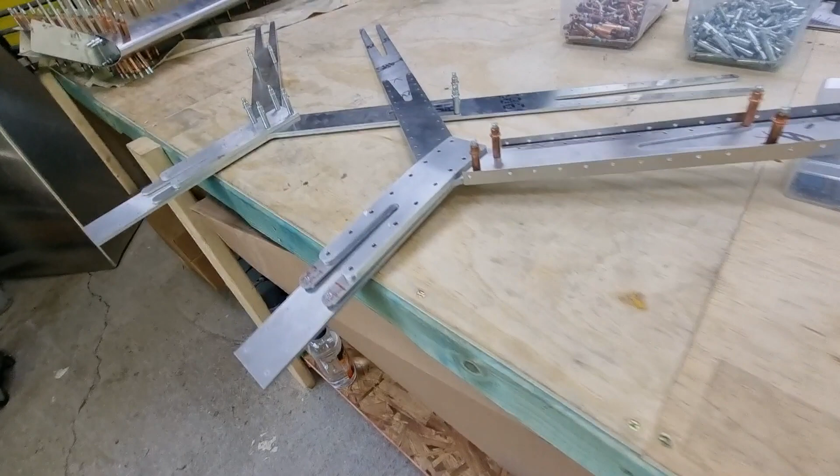Okay, this piece here is now a garden ornament. A paperweight, a piece that I can show other builders if they come around and say this is how you don't do it. And this is the replacement part.

I'm just going to go through the costs initially. The costs initially, I think, were around about $1,200 or something US dollars. About $1,400 US dollars to get it into this country. Now, I accept the fact that it's probably $200-300 in parts. I accept the fact that it's going to cost me upwards of $1,000 in shipping. The horrible thing about all that is it's converted back over to Australian dollars and ended up costing me about $2,100 something dollars. An absolute lesson has been learnt from that.

That could have been $2,100 Australian towards leather seats, a propeller, partial instruments, radio, painting, I don't know. Who knows? But anyway, money wasted, not that you put into your budget. So it's a lesson learned, and I don't really want to make another one. So let's just go through what I did.

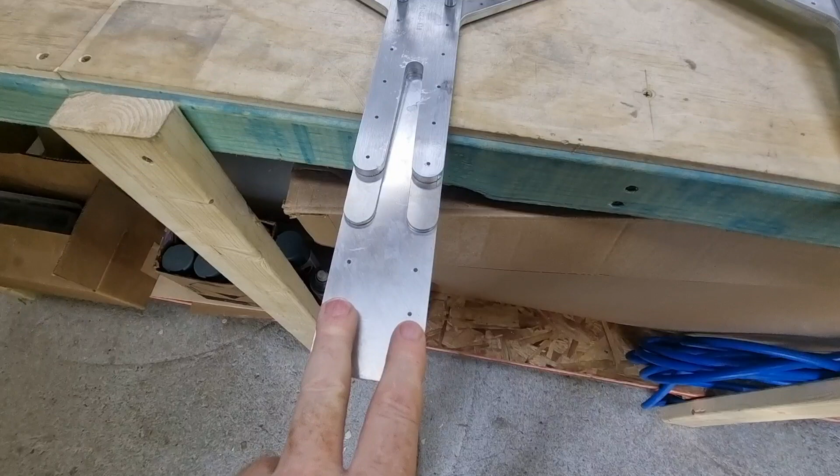Basically, as you see, I've just clecoed this new one together with silvers at the moment. Not all of these spars through here have been piloted from Sonex, like this one here is not, but it is from the other side, so it's allowing you to at least get a pilot hole through that manages to line up with this little tail post piece here.

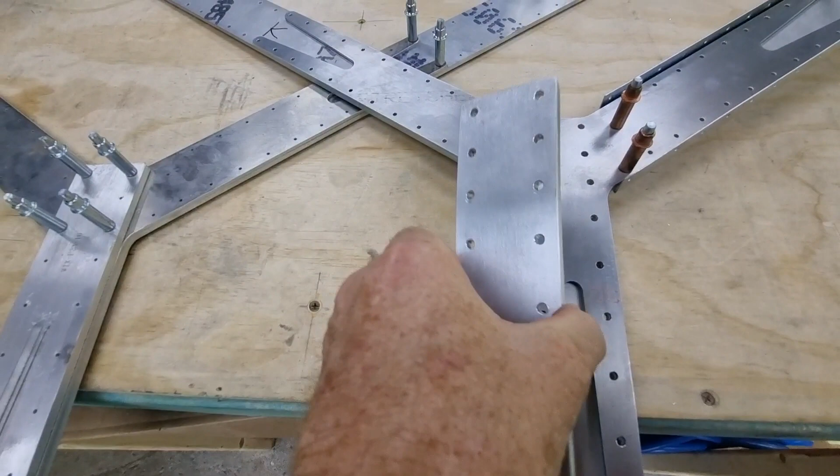What I'm proposing to do is, rewind. When I drilled all this together, my concern was that if I drilled it all on the level plane, and then when I bent it 5 degrees, would it elongate the holes to the point that they didn't line up? I don't know if 5 degrees is enough to cause that problem. I wasn't going to take that gamble.

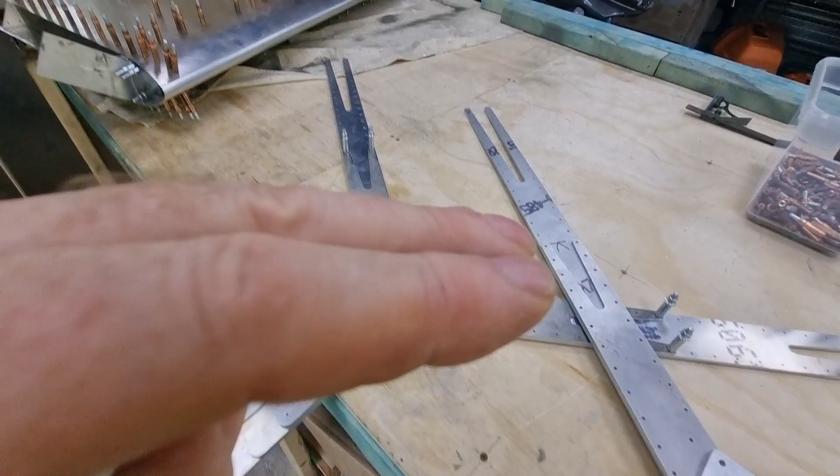I mean, if you just thought about it, if it was 30 degrees, well, surely that top face that's bending over has to become a longer distance, whether I'm not seeing it as it is, or whether I'm just fantasizing, I don't know, but I wasn't going to take that gamble. Suffice to say that I was going to clamp all this together. Let's go across to the piece that I'm talking about.

I was going to clamp all this together, so I did with little mini G clamps and basically some clecos and that sort of thing, and I drilled it in situ, which I thought was the more appropriate way to do it. So I put all the bends in it, clamped it all together, did all this upsizing as normal. I was happy with that side of things.

The problem was that I stupidly drilled all this outside of a little orange thing over there, if you can just see it, the old bench drill. I did not use it. The bench drill obviously allows the drill to be absolutely perpendicular to the face that you're doing, so none of this left and right stuff you're going to get if you're hand drilling. That's the mistake that I made.

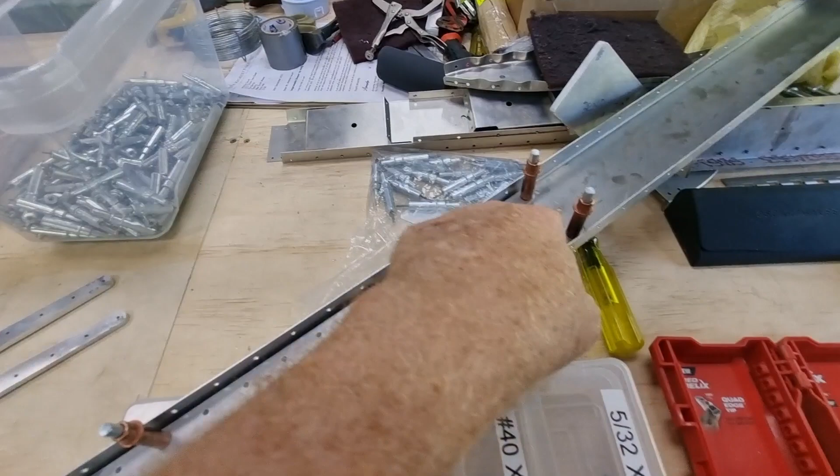And what I'm in fear of, if I drill these new holes in this spar in copper clecos and subsequently in the smaller of the Y tail spar, if I'm slightly out as I drill through the rear spar of the stabilator, then I'm going to make another mess, another mistake, and I might as well just throw all the empennage out and start again if I'm going to keep going down that path.

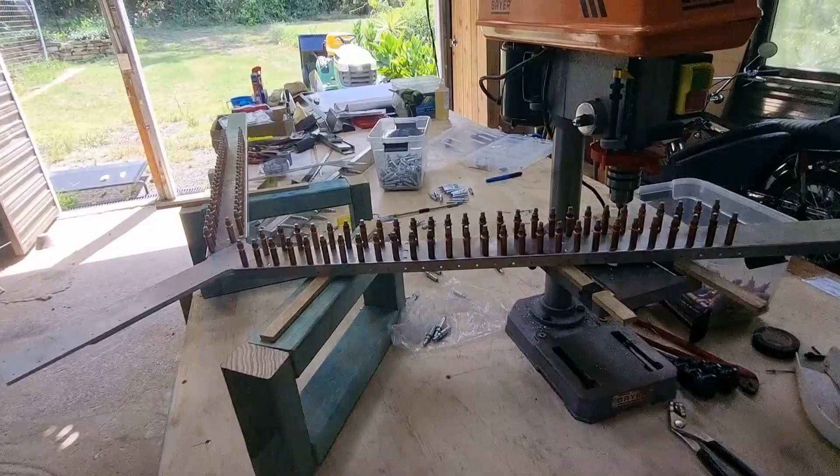But okay, I just thought I'd quickly show you the jig and the relocated bench drill, just to see how I was able to do this with one set of hands. I just moved these little jigs around as I moved the spar in and out up along here, just to give it a bit of a helping hand.

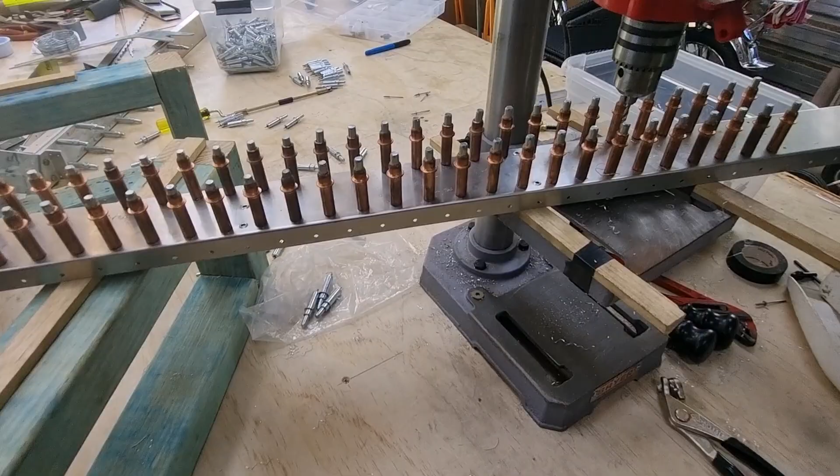Now, I did put this together differently compared to what I said I was going to do. Basically I said I was going to use the existing wrongly built Y tail spars and use them as a pilot hole through the new stuff. I didn't do it. I committed to doing 3 holes in the spar, upsized to copper clecos on the bench drill here, and at the tip end laid the spar in situ, and then looked all the way through. And if I had done it the other way, I think I would have had to then buy a new rear spar. So I did that both sides.

I then brought it up to the bench drill, as you can see, and I just effectively went through one by one by one. I thought it better to bring the bench drill, whoops, there's my finger, down on top of a hole that I could clearly see in the back of the rear spar, and upsize the spar, which needs to be upsized anyway. But if I drilled the spar first using the pilot holes of the other Y tail spar, there was every chance I was going to elongate these holes.

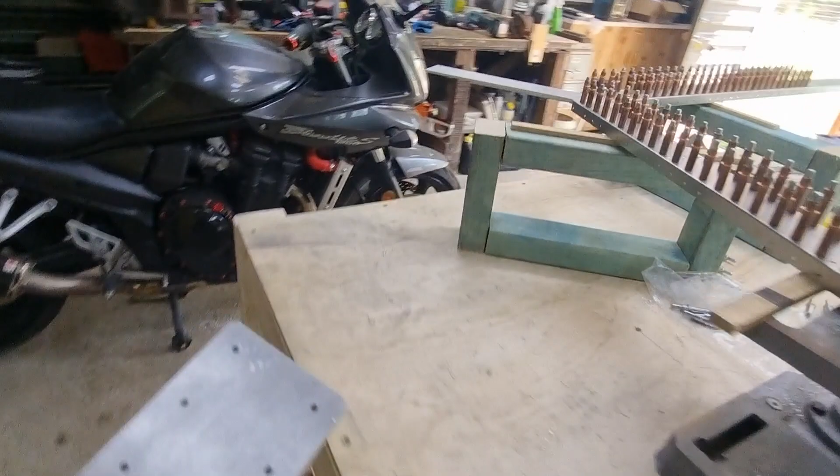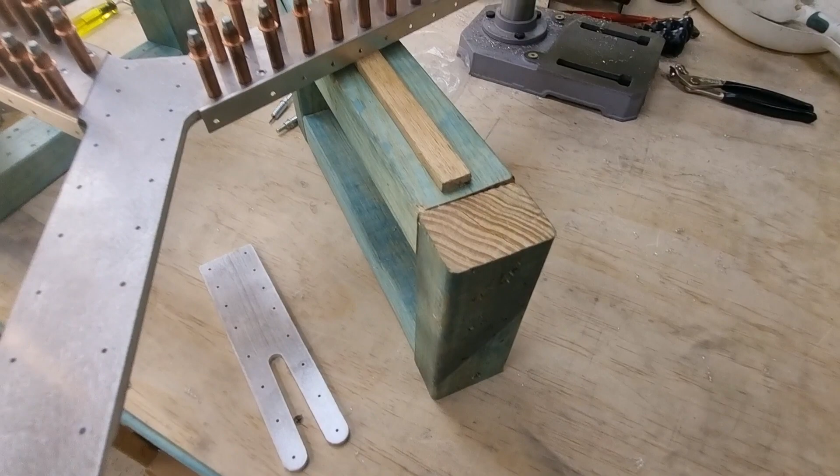I've silver clecoed all of these. I've had the other little tail post just next to there. I'm going to bring it over. The little tail post has also been put in situ. Around the other way, I think that goes, yes. And I've also fitted the rear tail wheel support. What I might do is pull all this apart because it's all been done on this side now.

Come back with another video and just show how all this, and then I've managed to put it together and sort of going through the next stages. I haven't bent these yet. I'm getting around to doing that, so let's just stop this now and pull all these copper clecos apart off the two rear spars of the stabilators and come back in a minute.

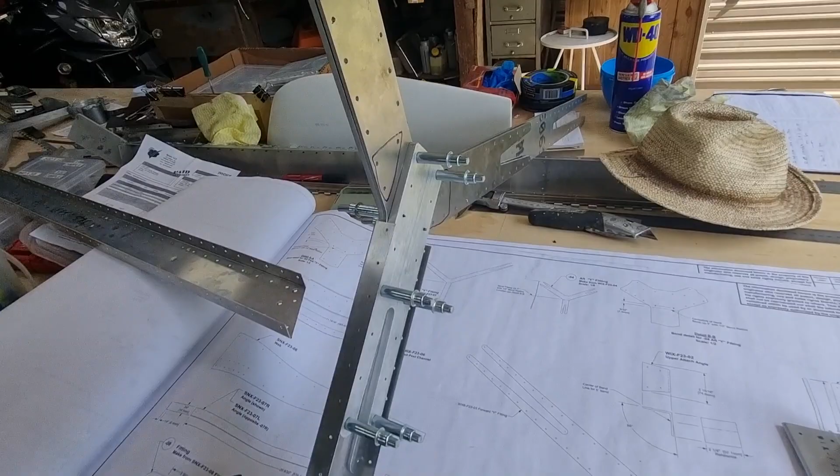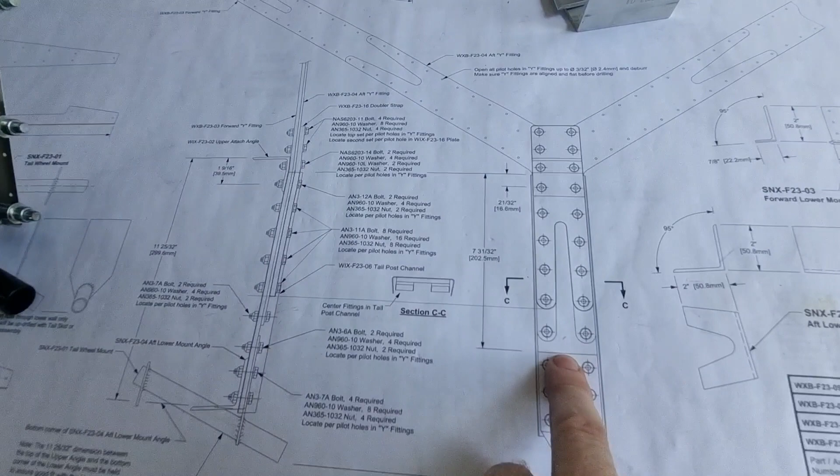Okay, I've disassembled all of the whitetail spars off the two stabilator spars. I've just got it sitting here on the bench. I've put in the last rib on the fuselage here, and I've also dry assembled the tail post in its position. Tail post, I got that dimension obviously off this fuselage drawing. It's 202.5 millimeters off the top of the last rib. Put it down, just piloted through the back of this because it already had pilot holes in it, straight through. So I've just silver clecoed it at the moment.

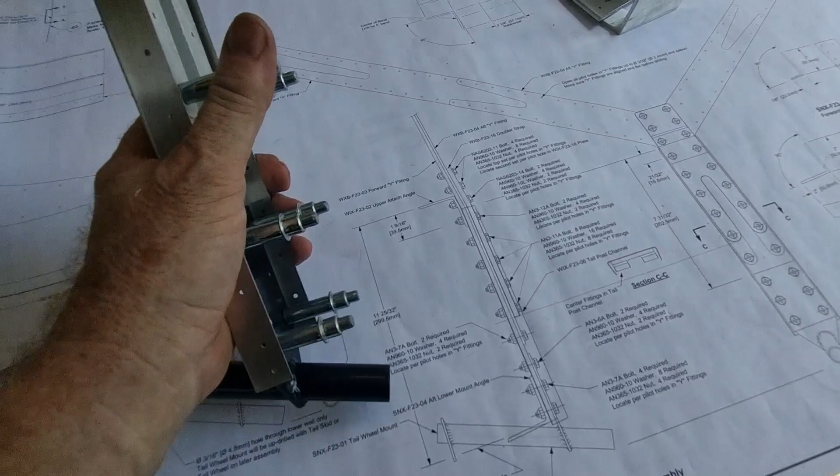There's two other supports that have to go in, and I'm probably going to put those in as well. This one here, which sort of fits down here a little bit, and this one here, which you can actually see the bend in it, because obviously these spars have to be bent that 5 degrees, sits around about somewhere there, I think it is.

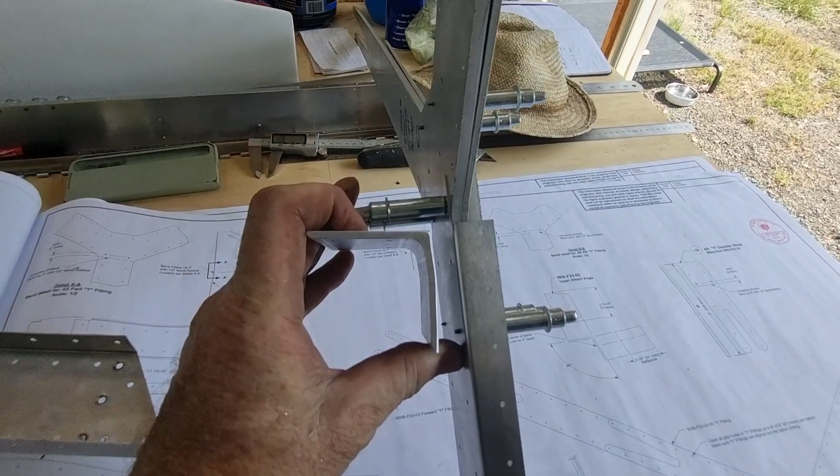So if you look on this drawing, geez, that sun's powering on through this roller shutter here, and it's so bright I can hardly see the phone. But anyway, I think it might be overheating, the same as me.

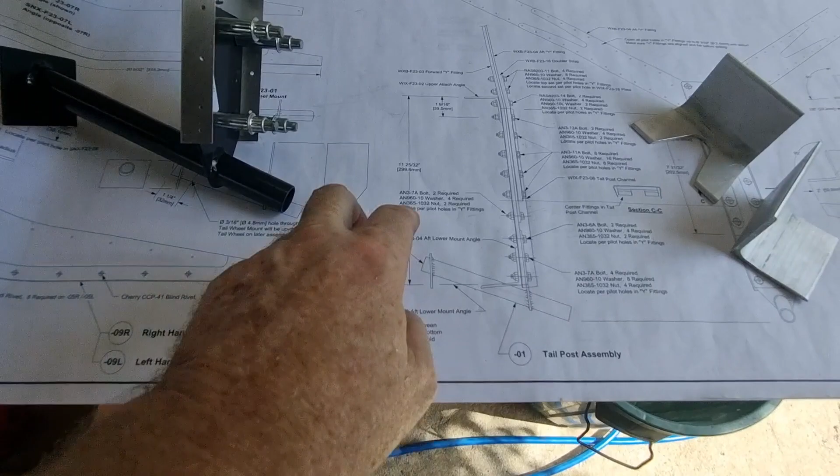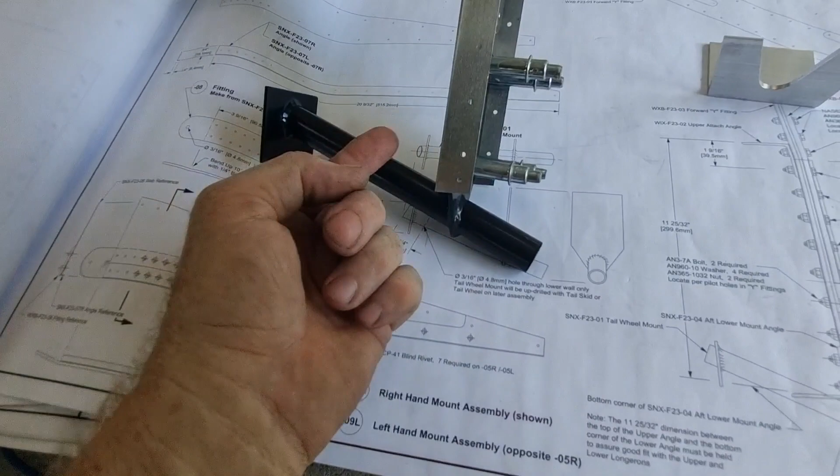So this dimension here I mentioned before is going to be very critical. And they even say it on a little detail down here. So to get the position for this, if you look on here, you'll see it starts at the bottom of that major spar sitting inside there, which is this big giant whitetail one here. So I'm going to have to transfer some lines backwards and forwards to get that around to the back. I'll probably take this tail post off, have a look how far it comes down. I think it almost came down to there. Clamp that into the back of it, take this tail post out, and then pilot through the whitetail spar through to this. That'll give me the holes for that.

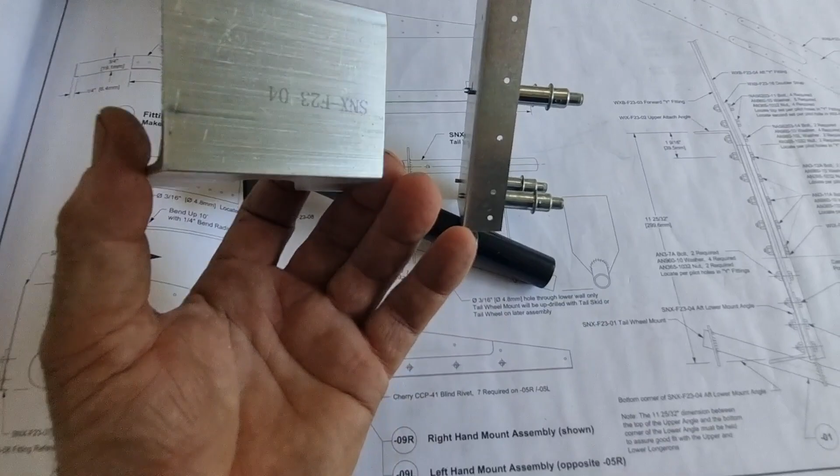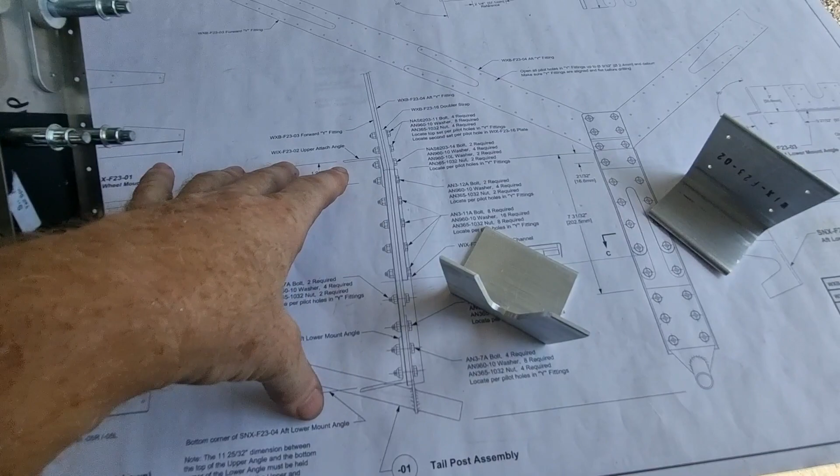Then I can measure from there upwards, which should give me the height of that, because that's the critical dimension. If that was slightly up and down, let's just call it 2 mil, 3 mil, it's not going to be that much, I don't think that would be detrimental, because it's more detrimental to have the skins correctly drilled into the rib, as well as all of these longerons which go through to here.

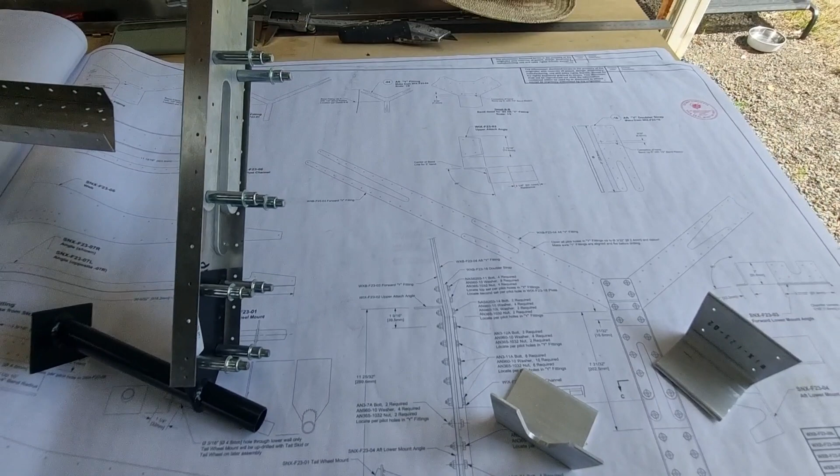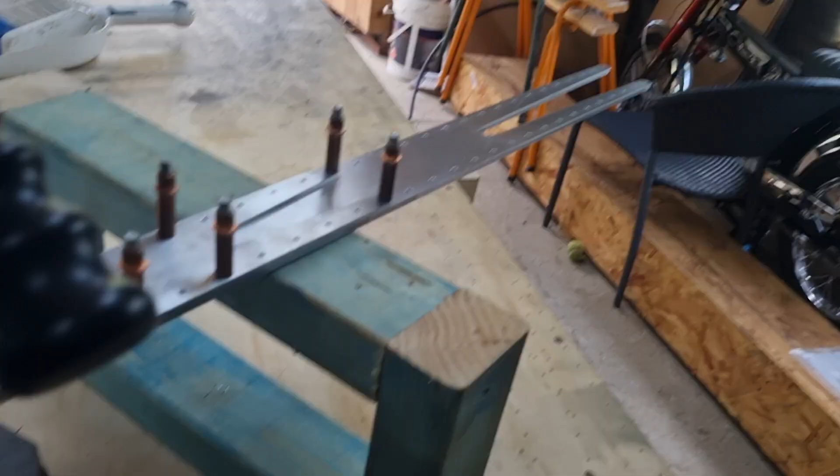Okay, welcome back from yesterday. I've got the spars all dry assembled in the bench drill, which I'll flip the camera around in a second and show you what I'm going to do. But I've just basically bent it, dry fitted it with silver clecos and copper clecos. You'll see where I've put the copper clecos and the two Y-tail spars themselves, and ready to drill. So here it is, all set to go in the bench drill.

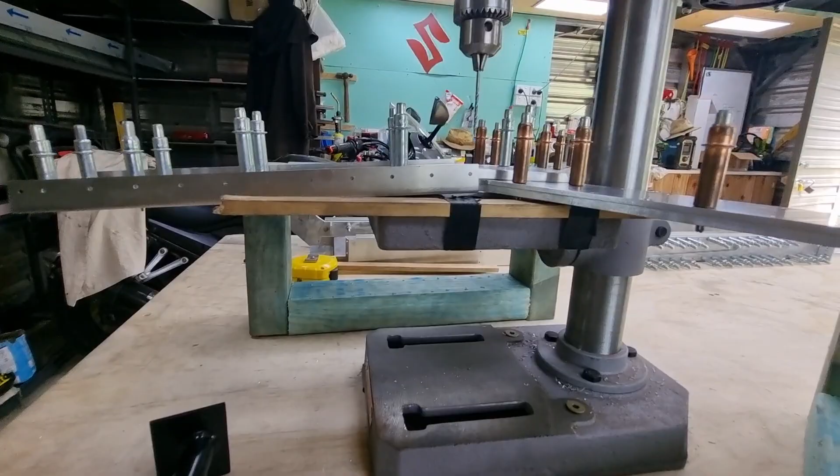This will obviously go down into each hole. As you can see, nice and square, or nice and perpendicular to that. Obviously this from here to here tapers down, so when I do that section I can't drill it in the bench drill that way. I'm going to have to flip this around on its side and lay this section across that way and then lift it up somewhat, because if you look on the side elevation you'll see how that's bent down, so that will have to go up around about there somewhere.

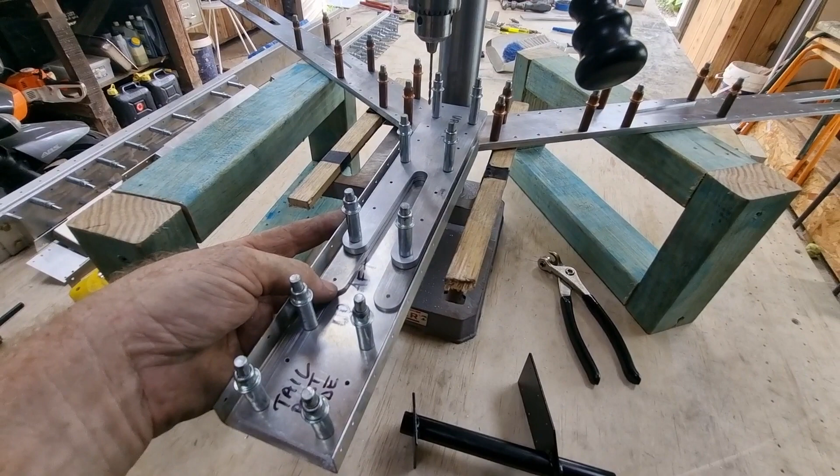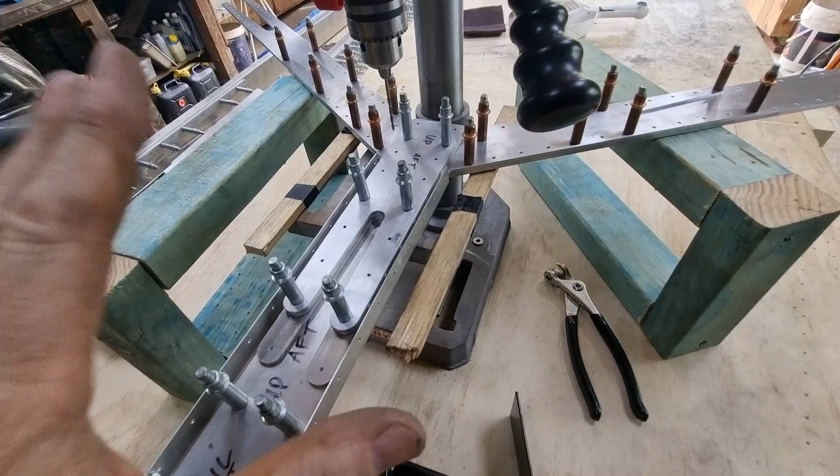I'm going to leave all these silver clecos in to ensure that nothing moves, so it'll be upsized in these holes, so basically 2, 4, 6, 8, 10, 12 holes will be upsized this time. I'll then put some bolts through it, remove these clecos, and then upsize the rest of it.

I'll probably leave, no, I think I will. I'll still drill these all the way through to the AN, whatever size bolts they are, through the tail post, but I'm going to leave that small angular bracket off there and the same with the angular bracket off here, the underside of this rib here, and do that with the fuselage when I install this Y-tail section to the fuselage.

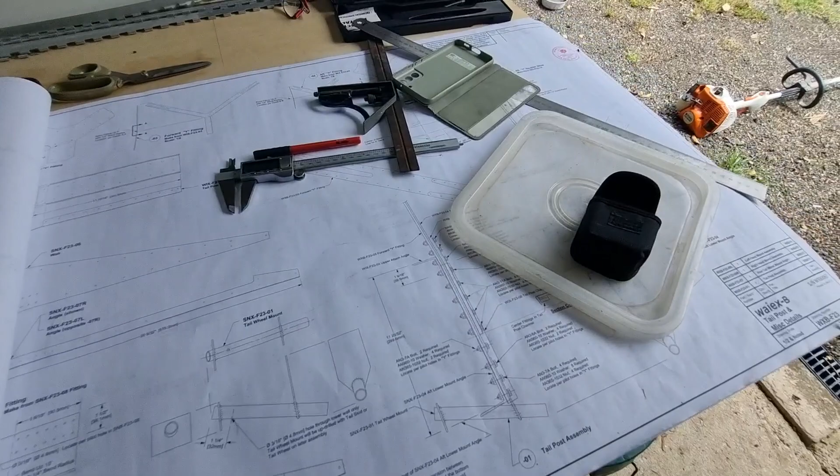I think it's better to ensure that all of these line up with the skin, the longerons that come off here. Then I've got a little bit of an adjustment to do inside this angle. I'll just quickly go over to, I don't think I've got the drawing out actually. Let's have a quick look. Yes, I have. Okay. So what I'm saying here is I'm going to leave this little angular piece out.

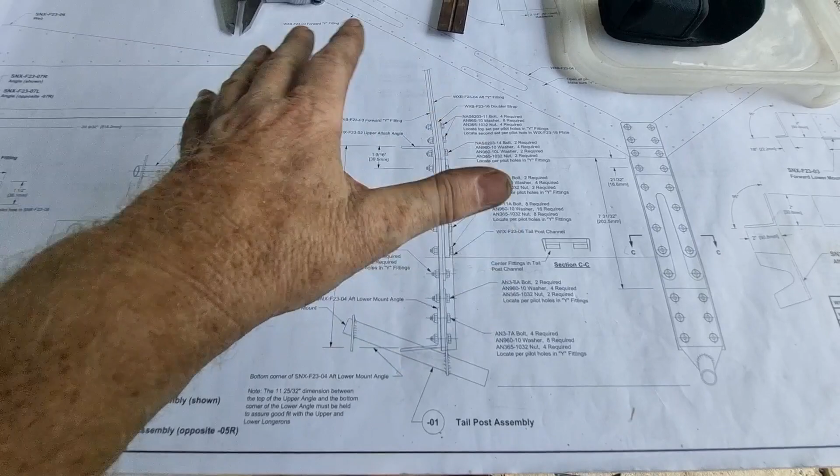I'm just going to finish off all of this, including putting all the bolts through, tighten it all up, ensure that it's basically done properly, prime it and reassemble everything together, and then do this section, the angles, the 2 angles with the fuselage. That way I've got a little bit more tolerance in adjusting up and down in these 2 upper attach angles and the lower mount angle, which is just on here.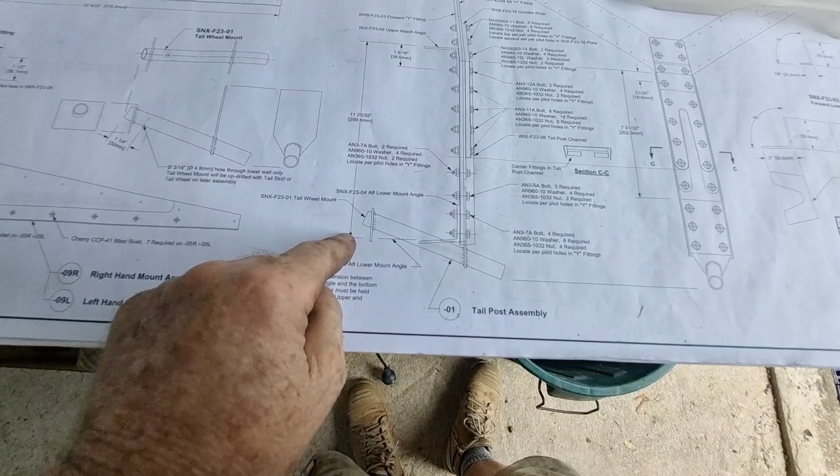There's a critical dimension here that it does talk about on the drawings, and it's got a special note here to ensure that they are that dimension, otherwise nothing's going to line up. So it's better just to finish off this section and do the other half section at a later stage. Anyway, I'm going to start to throw these holes in on here. It's going to be a long process, but I'd much rather this take 8 hours than to spend another $2,000 if I get it wrong this time.

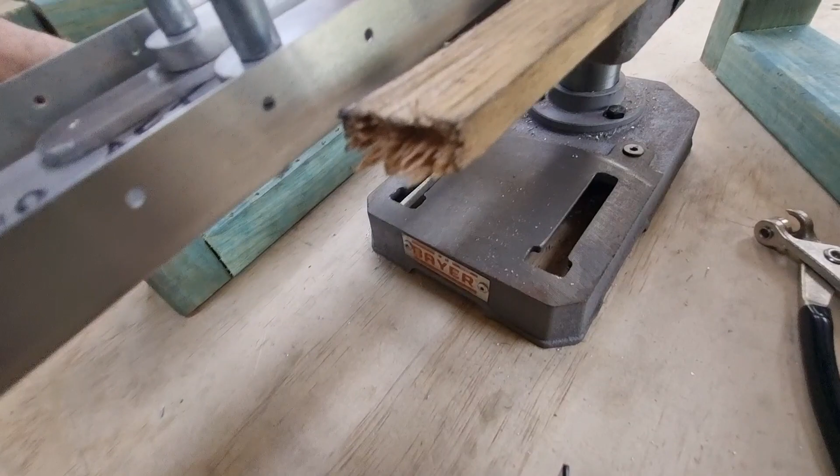So I've just got a little support under here as well, just because if I take that out you'll see what happens. It's, you know, a little bit floppy. We don't like floppy. I don't think anyone likes that. So let's ensure that it's basically nice and secure, which I think it is. Anyway, I'm going to carry on and drill these.

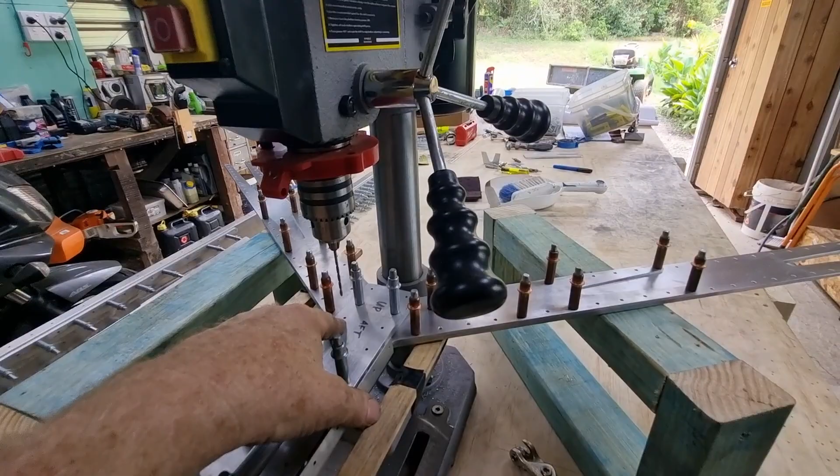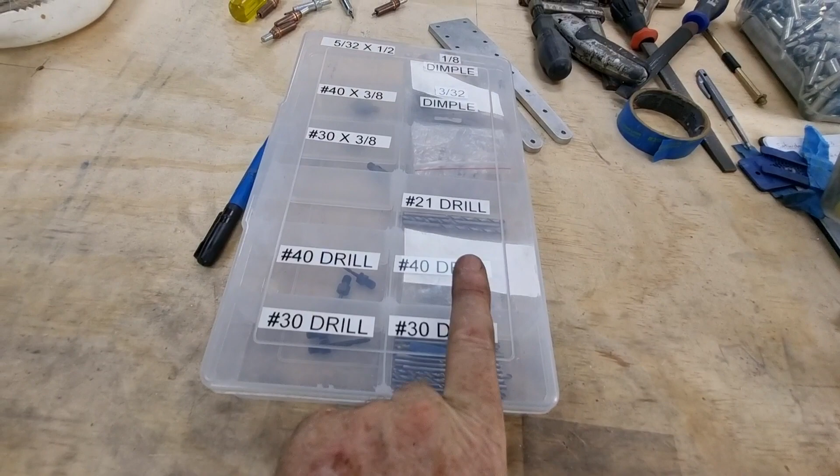Just the drill size is going to be 3/32 to copper clecos, number, what was it? Oh, just grab that over here. So I'm going to go number 40, number 30, number 21, then up to the 3/16, I think it was, this is so hard to do one-handed, 3/16, which is the AN bolts. Anyway, I'll start now and come back to you soon.

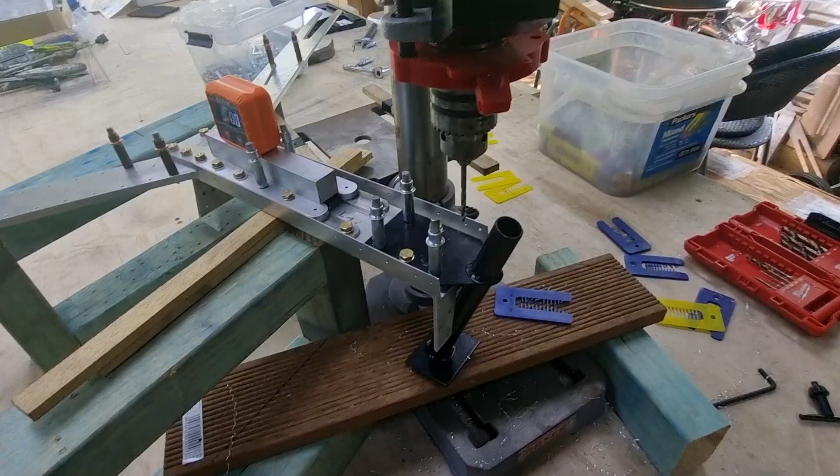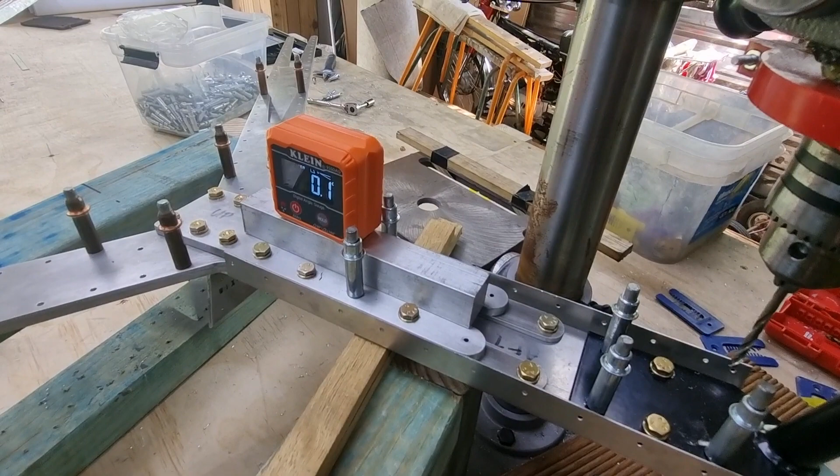I'm about 1, 2, 3, 4, 5, 6 to go, so sorry, 8 to go, so going extremely well at the moment. Just doing the tail post, 2 to go, and then it's just a few extra in the rear spars. Now you'll see that inclinometer dropping between 0.1 and 0 degrees. They must be that accurate. You just got to move the bench and it slightly changes, but it's all going extremely well. So I just thought I'd do a quick halfway video. All the bolts are in, and I'll come back to you shortly.

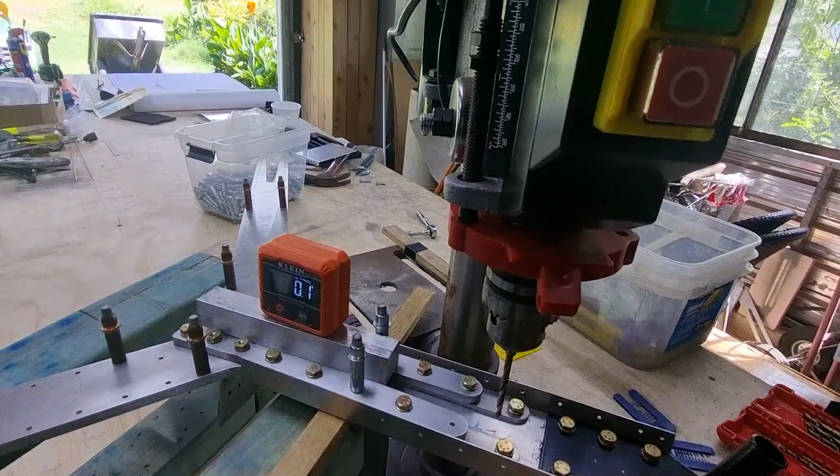Thank you. Another quick update. We've got 3 holes to go, so I just thought I'd show you how I am spinning the drill press around like this, so I can easily take the new size drill bit and spin that back around to the hole. Whoop, doing this one-handed again is awkward. I need an extra pair of arms, but you get the general idea.

So I just drop that down and hold it secure. It's held here, it's all pretty much level. I don't think anyone's going to argue at point one. Anyway, quick update, 3 to go.